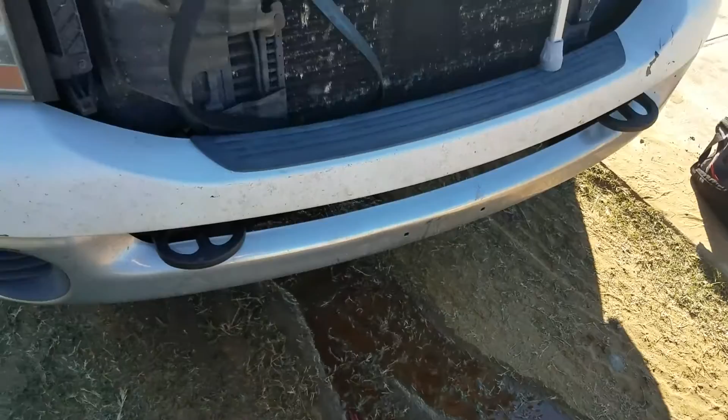Okay, we get to do another impromptu Dodge 3500 2006 repair.

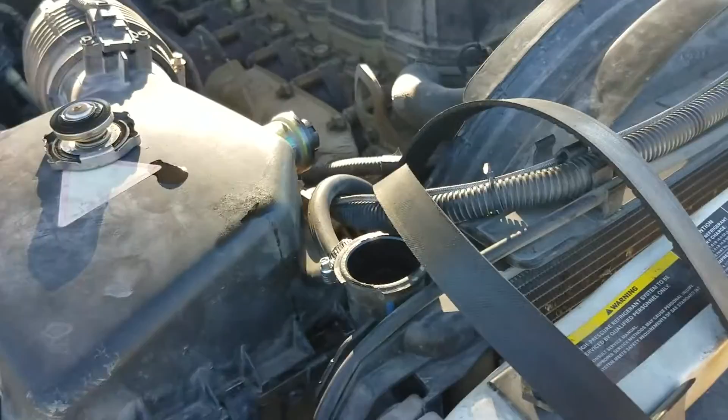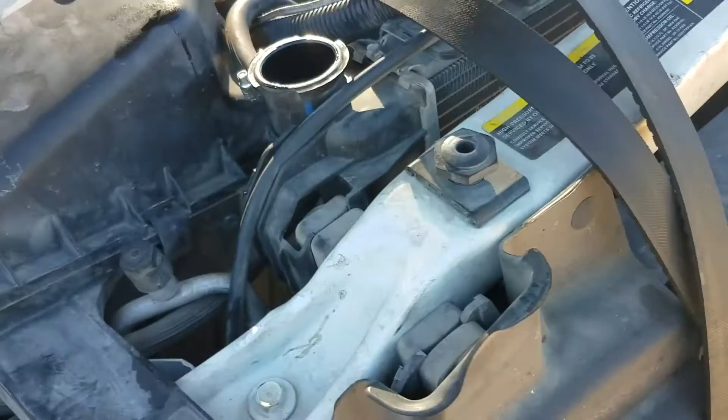Was going down the road, lost all power steering, and landed up in the ditch. Saw that my serpentine belt was just kind of hanging around. Mind you, it's not supposed to be hanging around, it's supposed to be all tangled up in your motor. And it was not tangled up in my motor, or not the way it was supposed to anyway.

So I started to pull that out, and that's when I noticed that she's peeing quite a bit. So probably what happened is the water pump went bad, which caused the belt to slide off. It's a pretty straightforward repair.

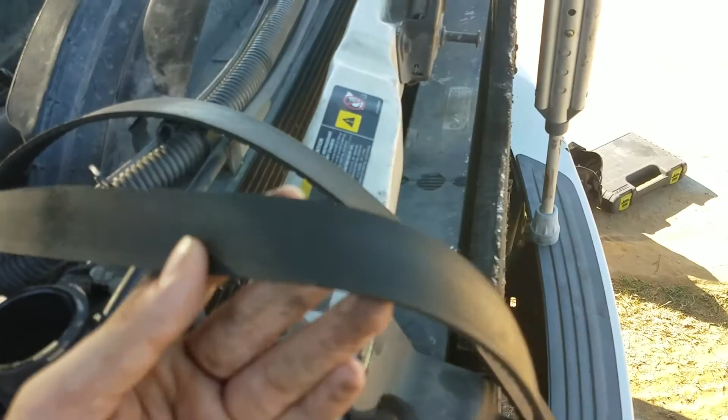I replaced the belt and replaced the water pump. If you don't replace the belt, it could have stretched, and it's just not good practice to reuse it if you don't need to. I already had one in the truck, so I'm going to go ahead and replace it and keep the old one. If the old one is still good, keep it just in case you break the one that was in there, so you have a temporary backup.

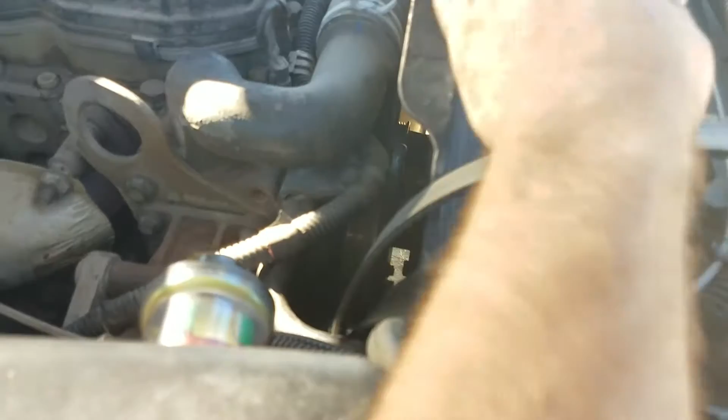But to get to the front of this motor, because it is a little bit tight up front, I'm going to remove this cowling right here, and I'm just going to start trying to figure out what all I have to remove to get access down in there.

So I'll keep you all posted as I go along. Once again I'm using a crutch, it works perfect, although I do need to replace these shocks.

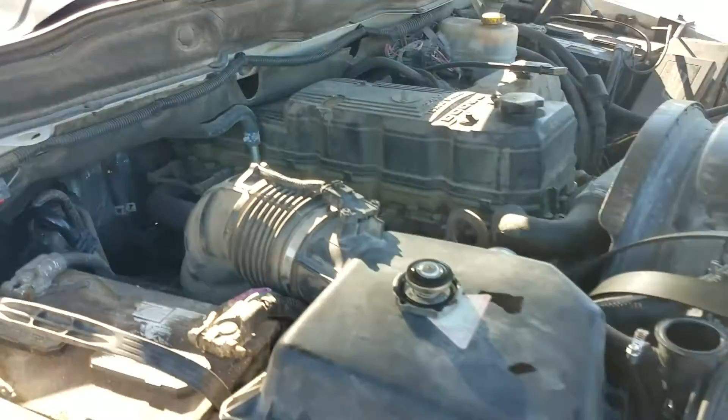I've been spending money everywhere else on this truck. Although I still love this truck. Anyway, let me get to it.

Yeah, I'll show you when I get a little bit further along.

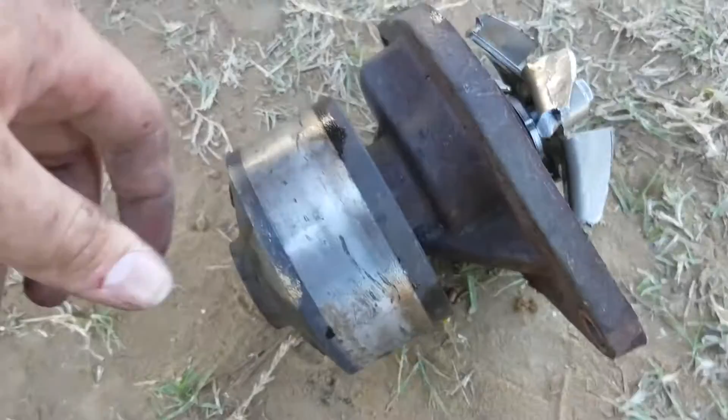Alright, well, it's the water pump. You can see where it hit right here on the block. The block seems to be okay. I felt up in there, but you see the bearing in there went out.

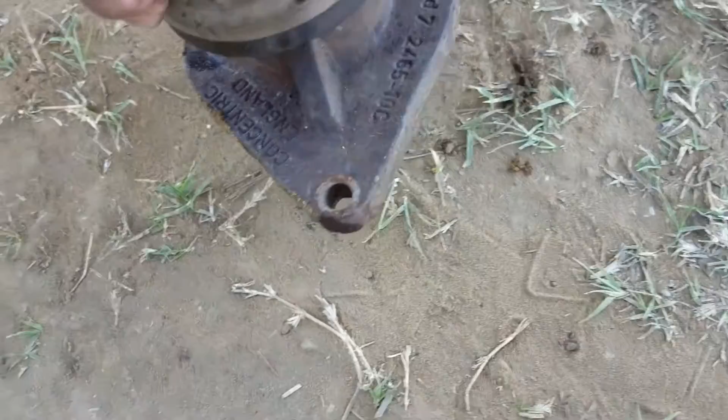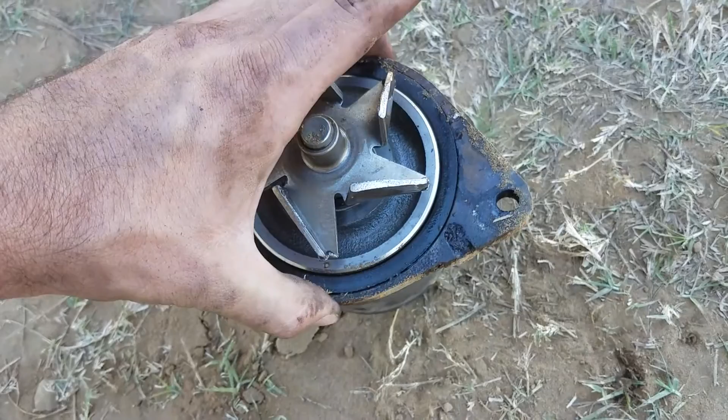That was sharp. This is not supposed to wiggle like this. See, I'm moving that side to side. Not normal.

I ended up just reaching down in there and pulling it out. It's not exactly easy, but it is doable. Just trying to take that fan cowl out, it was going to be too difficult, so I just opted not to do that.

Anyway, I got to run over to the parts store and get a water pump. Not too bad, but that's why the belt came off. Anyway, let me go get that.

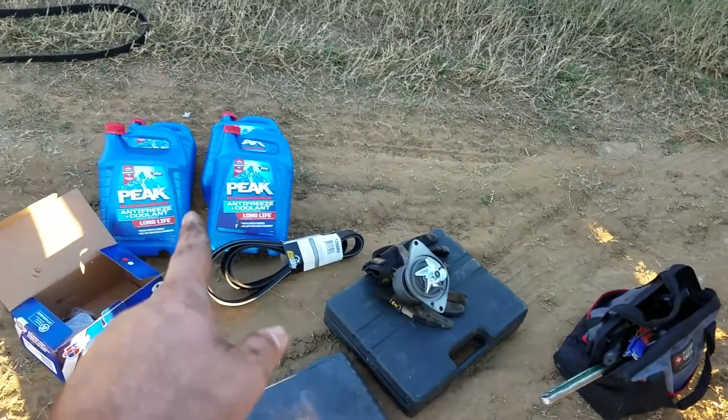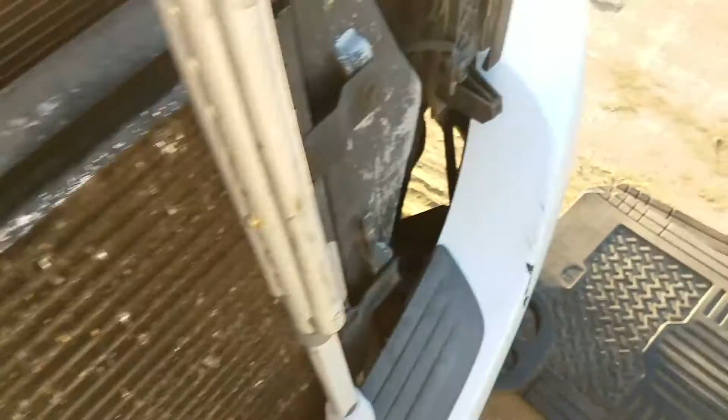Alright, the sun is starting to go down, so I don't know how much I'm going to be able to get done. But I got the new water pump, the belt, coolant, got everything I need. One thing to take note, the new water pump did not come with new bolts. Thankfully, I didn't lose the ones I had, so that'll be easy. And it takes the number 10, by the way.

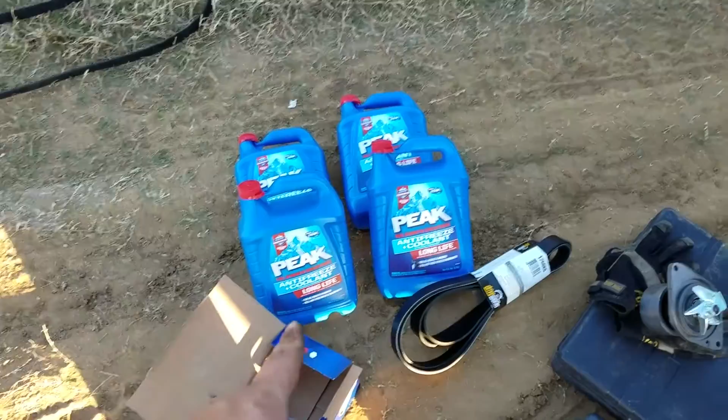Wait, no it doesn't, it's bigger. I don't remember what size it is. Anyway, for this truck it takes 4 bottles, or 8 bottles if you're running the 50-50 mix.

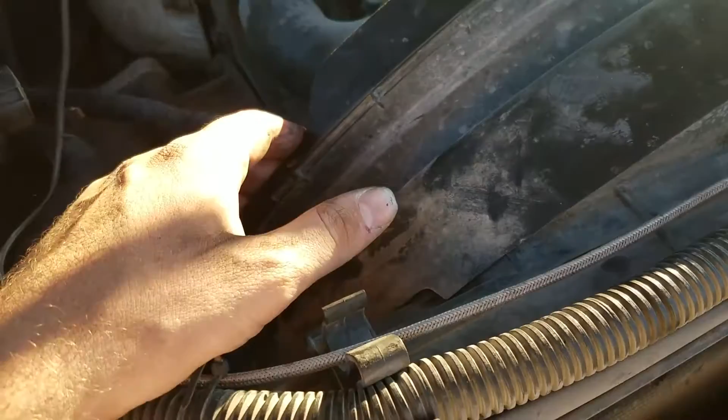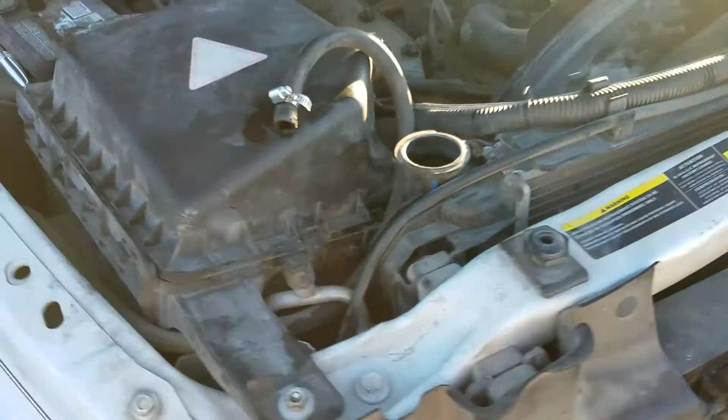Just always buy the concentrate and mix it with water yourself, it's so much cheaper. Anyway, as I was saying before, I didn't take this off because that would have been harder. I just pulled this like that and jammed the water pump right through here the best I could and got inside that hole. But I want to try to get this done, or get the water pump on before the sun goes down, quickly losing time. So let me get to it.

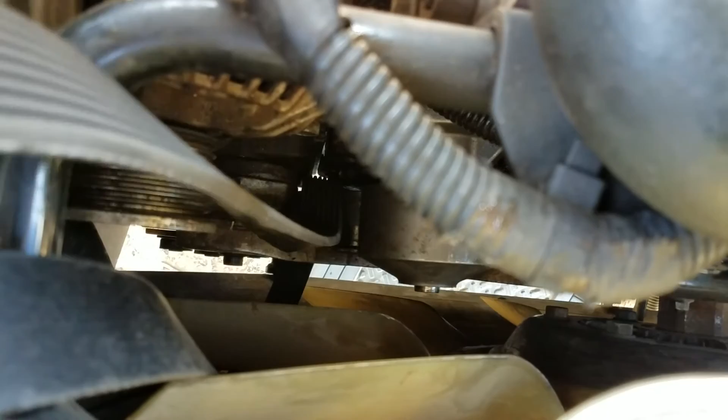Okay, sorry for posting this after the fact, but to get the belt on, you have to go around that pulley right there at the bottom of my finger, okay? Now, to actually get the pulley there, to get the belt behind it, is extremely difficult. Best way of doing it is remove the water pump, which is right there.

I had already put that on from the other day. Figured out I got to remove it to get some extra room just to get this belt on. Fought with the belt for probably 5 hours. Took the pump off, got the belt on in 10 minutes. Okay.

Really kind of shitty design, but it is what it is. That's what you just got to do. That, or you take the tensioner off, but the tensioner doesn't want to come off very easily. So, yeah, that's just kind of where we're at. There's no coolant in the vehicle already, due to the fact that the water pump had to be replaced the first time around. Anyway, I'm still half tired and asleep, but hopefully I can get this together here pretty quick. But yeah, just take that pump off. It'll make your life so much easier, trust me.

I didn't want to do it, but sometimes waiting around to do something takes longer than just doing it. Taking it off, yeah. Anyway, let me get back on this, because I don't want to be doing this all day. I'm tired.

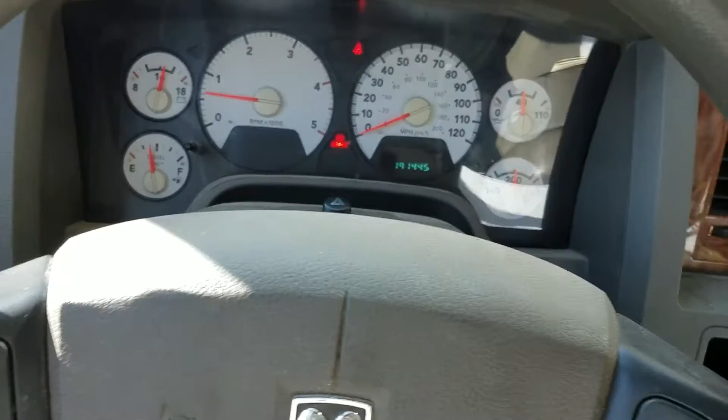Okay, as you can see, my truck's running again, and I got power steering. But let's take a look at this.

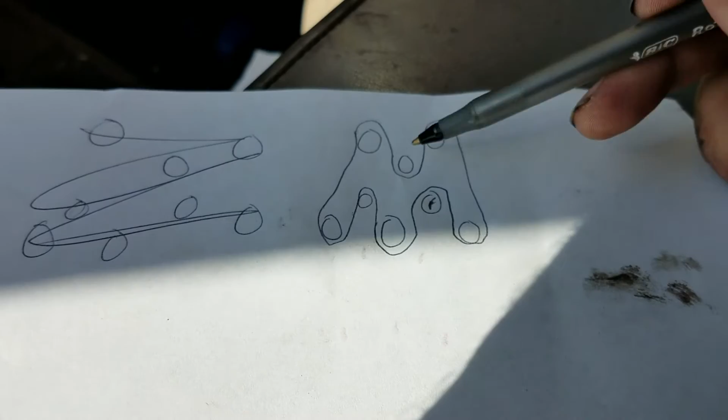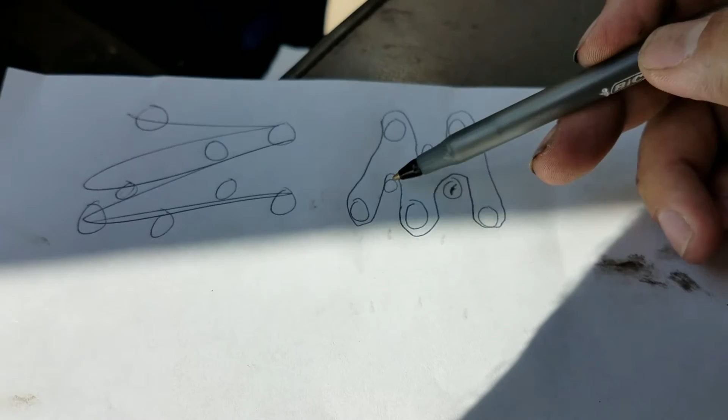So getting the belt on is not easy, and it's relatively hard. This is the fan pulley right here, and it's actually directly above the crank. This is the crank. So what's really hard is trying to figure out how to go around this and string it, basically. And the easiest way of doing it - this is the tensioner - you have to put it on the tensioner first.

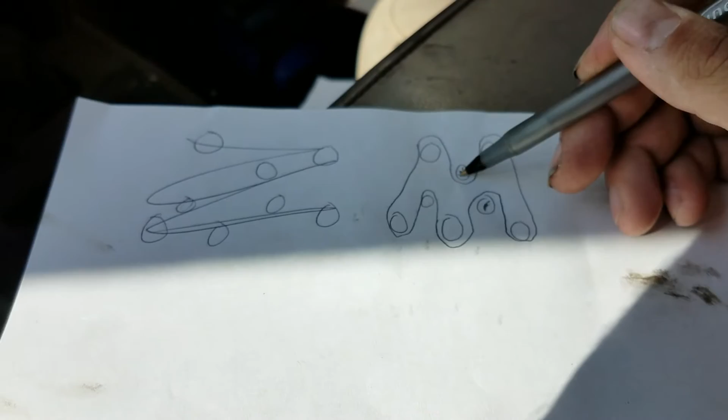This is the water pump right here, and it's easy. If you remove this water pump, you can gain access to the tensioner much easier, so that you can wiggle the belt behind the tensioner like you need to.

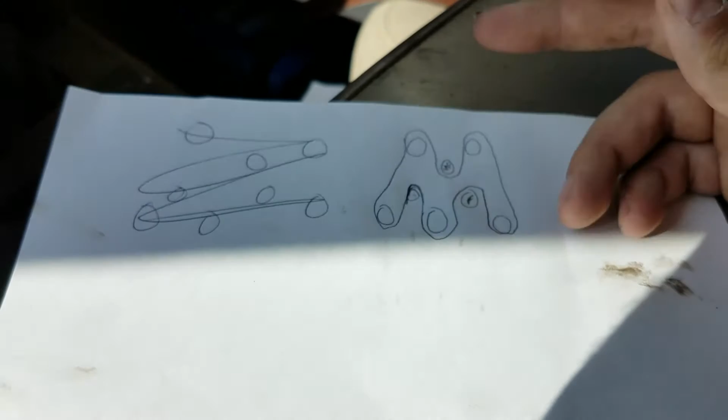So after you do that, you put the water pump back in, then you run this down and around the crank, okay? And it's actually something more like this. So you're running it, both ends, down and around, and then you shove them both up through here like this. I'm just talking about both ends.

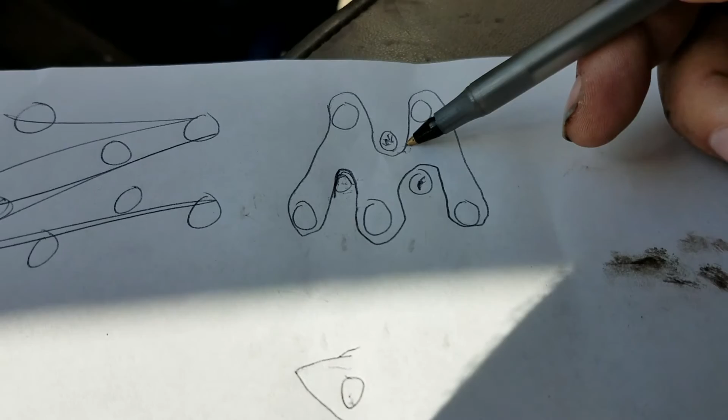Yeah, it's going to be tight because here to here it's not very wide, but you just got to shove it in there and do the best you can. And then once you get them both in here, like you see right here, what you're going to do is just pull it through, loop it up around the power steering first.

It's easy. In retrospect, if we look here, it's more like right here is the power steering. So I just looped it up on top of that to hold it in place. Then I went back underneath, fixed it around this and around the fan.

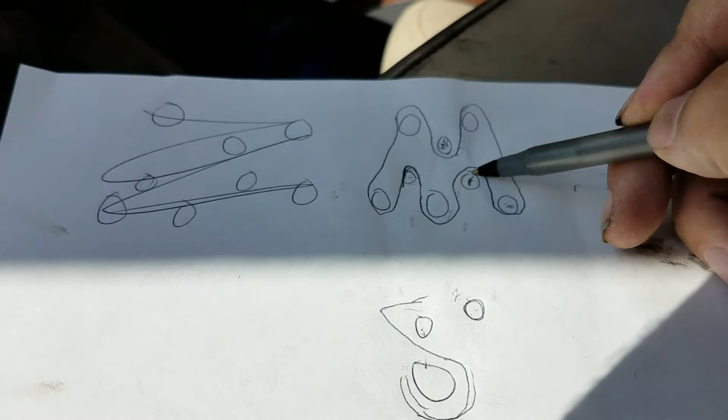After you do that, then you take it off the top of this pulley, and then you pull it around, put it on top of here, and then you got these two pulleys done. And it's waiting for it to go into the water pump and alternator.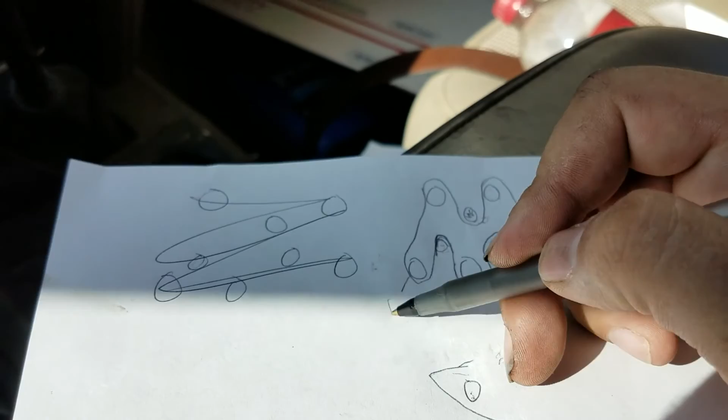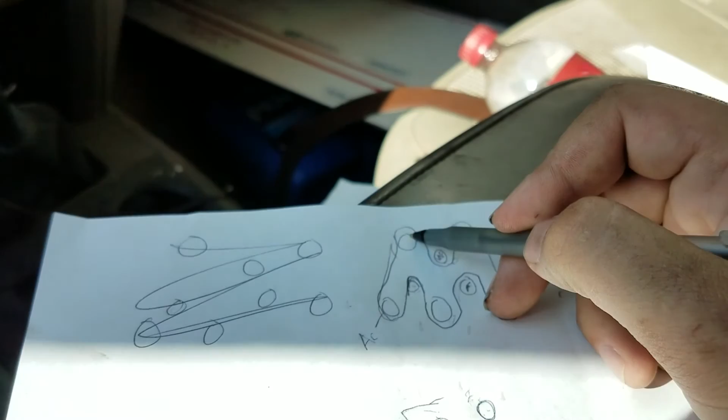And then you go back down, you get it onto your AC compressor, which is this one right here. This is your AC. And then you run it up through the top, and then you can either put it on the water pump and then do the belt tensioner to get it onto the alternator, or put on the alternator and then slide it onto the water pump.

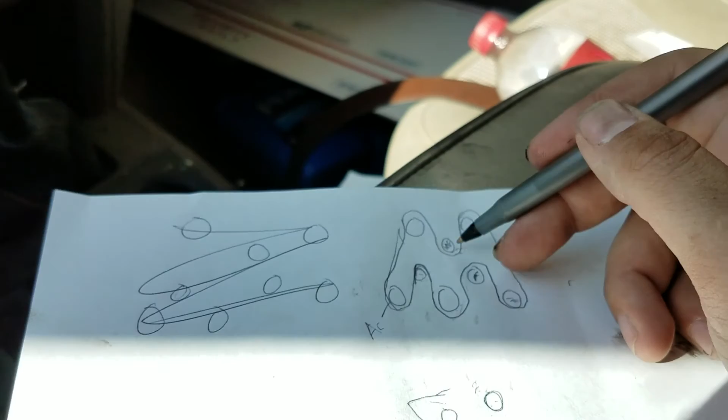Now, getting my hands down to the water pump is not very easy, so I found it easier to slide it onto the water pump first, do the belt tensioner, and then get it onto the alternator. And that's that. Truck's running, and I'm back at the house, so no complaints.